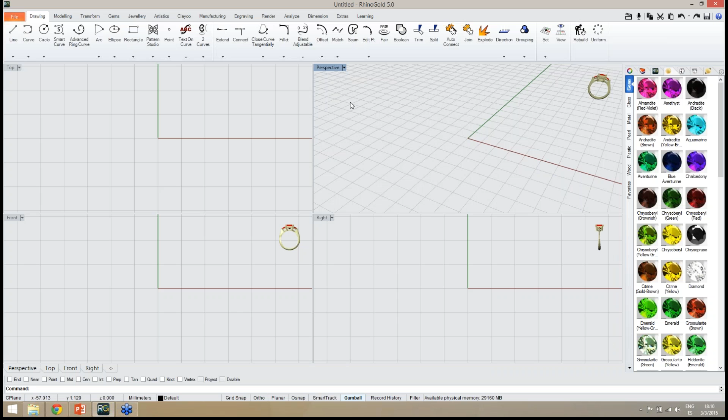Webinar. Let's open RhinoGold, and now let's start with this model. So I'm going to start with an image. Usually we can use any image. In this case, I have one image here, and we can just drag to Rhino.

So the idea is to define a picture frame, and now I can define 2 points. Actually, in the top view, it's easier. So I just define the first point and then the second point. Remember, you can use the ortho to automatically define the image correctly.

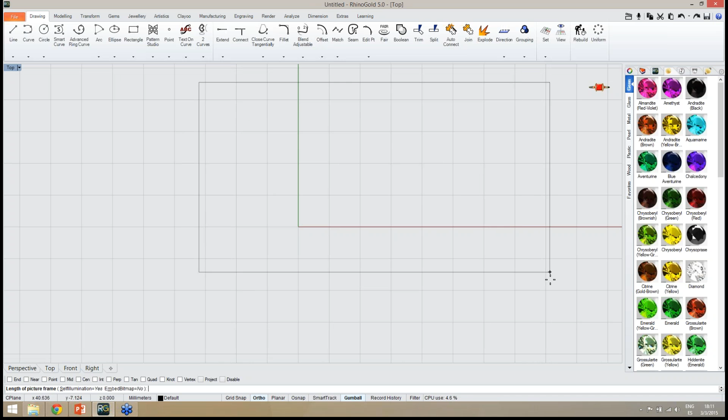So the idea is to define the image. In this case, as you can see, it's not a high quality image, could be any image or a sketch or a photo. So the idea is to guide us during the modeling process.

So I'm going to use this image, and in the properties tab, I will select the material and I can define the transparency. In this case, I will define a little bit more transparency, as you can see, just because I want to see the grid when I am creating the curves. So this is the idea, just define more transparency.

And as you can see, the image is not perfectly centered. So I'm going to use the drag, just click and define the image in the center. And now I'm going to lock the image. So to do it, just go with the lock and unlock.

Remember, we need to use the shift. So I'm going to lock this object, and now when I select it, it's locked. So it's helpful in order to create all the curves without being always selecting the image.

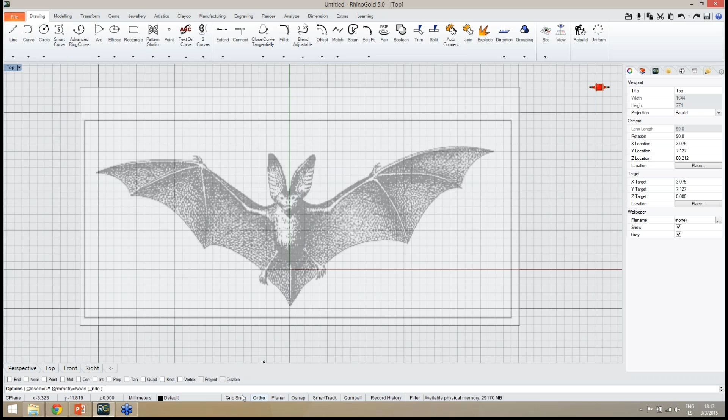And I'm going to activate the Grid Snap option just to start the curve exactly in the midpoint, because in the end I will create the symmetry. So I start with this grid snap activated, then I can disable it. And now the idea is to define my curve just following the image.

So as you can see, easily I can follow the image, just defining the curve. And one thing we have at this point, I want to create a sharp corner. So to do it with the Smart Curve tool, I just need to press the Shift key, and automatically I generate a sharp corner.

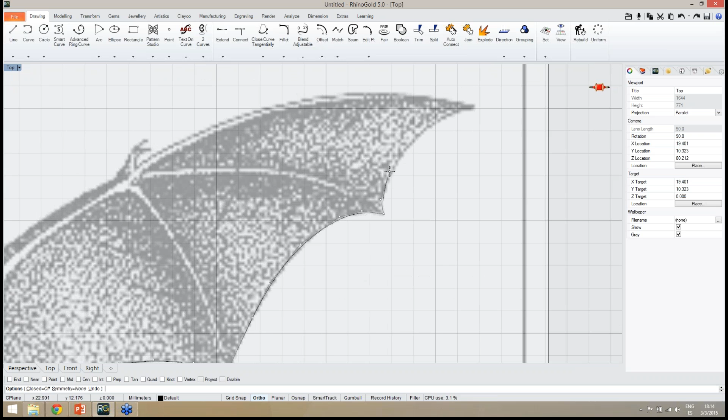So now I can move on with my curve following the image, and here I will do exactly the same. With the Shift key, when I click to define this point, I define a sharp corner and follow the image, just defining some points. Remember, at any moment we can edit or even undo the curve. And once again, Shift to define a sharp corner and following the image again.

So this is the idea, very easy, as you can see. Just find some points, and now I'm going to follow this shape all around easily. When we need to define the curve, in this case with the bend, the curvature, we need to define more points, but then it's just finding the points we need to follow the image.

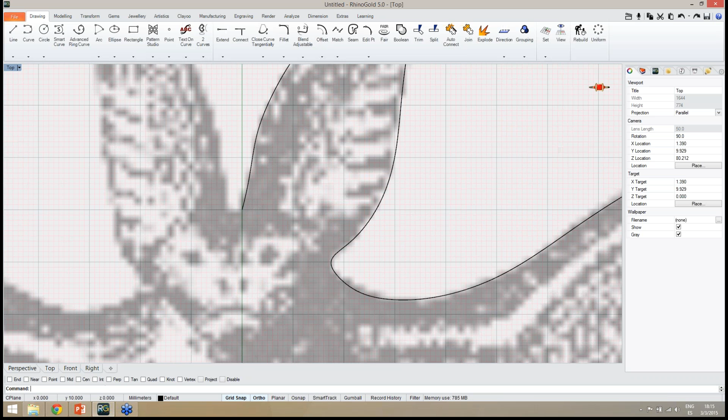In the end, I'm going to activate grid snap again, just to define the midpoint exactly what I want, and press enter to end the curve. So as you can see now, I have this outside curve, and I'm going to save my file.

So on the desktop I can call it bat bracelet. Okay, in this case, save, and now I'm going to move on with my model.

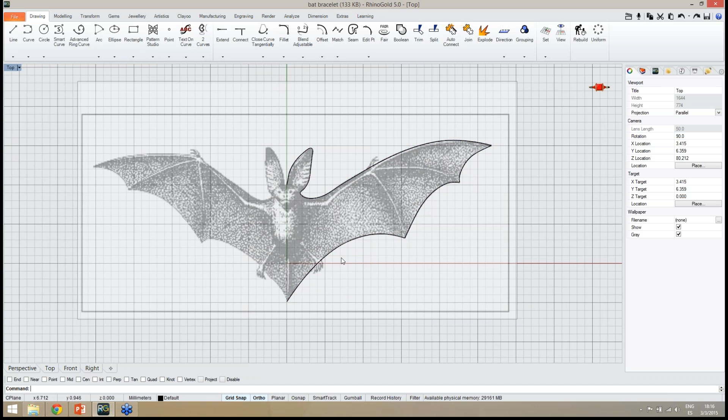So the next step, I'm going to define the rest of the curves. I will need to start with RhinoEmboss. So the next step, I'm going to define the body. So to do it, once again, Smart Curve tool.

And now in the command line, I'm going to use the symmetry option. So I just click on symmetry, and I have vertical, horizontal, and quadruple. So I'm going to use the vertical option, and also turn on the closed option. Everything in the command line, and disable the grid snap. So the idea now is to define the body.

So as you can see, automatically I have the symmetry for my curve, and I'm going to define the curve like this. Okay, looks good.

Also, I will define another curve, once again with the Smart Curve tool, and once again with the vertical symmetry activated and close activated. So now I define another curve here, and let's move on. We'll define now another curve here, just using the Smart Curve tool.

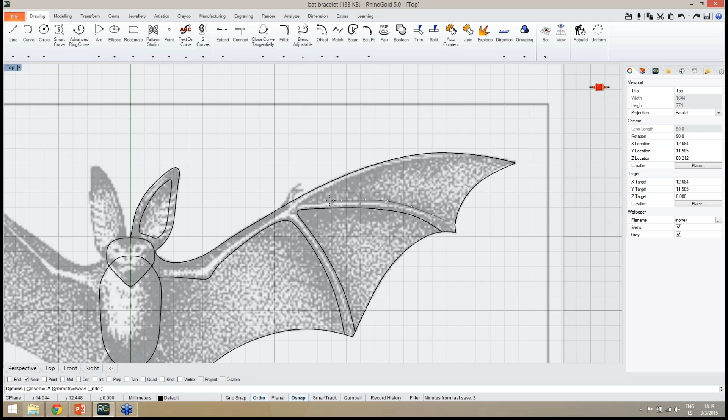The last one in this part, I'm going to use Smart Curve again. I start in here and follow the image as reference. In this area I zoom in and create a few more points to make it exactly as I need, and define the rest of the curve. As you can see, for the last point I use the near option, and we are creating all the curves following the image.

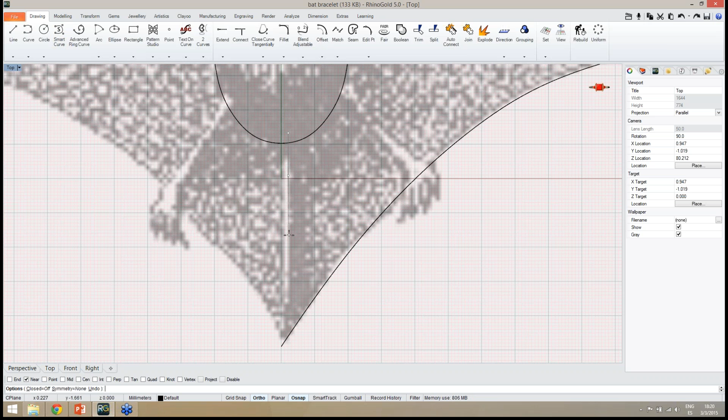So now I need one more curve in here. Once again, Smart Curve. I start maybe a little bit inside, and I can go through this area and finish with the near option again.

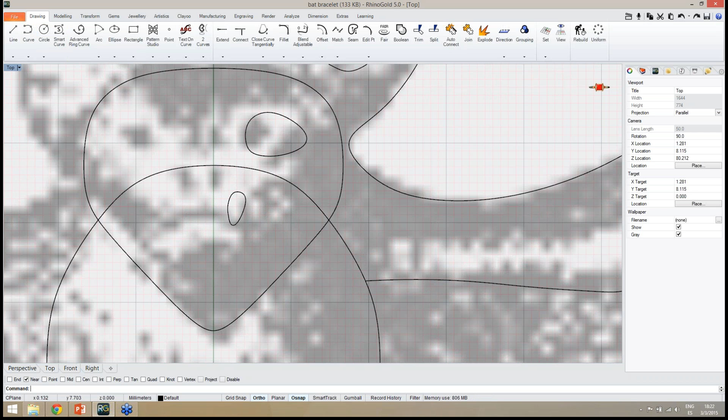And another one for the nose. Okay, Smart Curve. In this case, as you can see, the image is not exactly in the center, but I can adjust the model how I want, and then create the symmetry, so it's very easy.

Now I close the curve once again, and I'm going to create another one in here. So Smart Curve, I'm going to define, close it, and I start inside and follow the image. The resolution is not very good, but it's good enough to use as reference. So I just define the points like this.

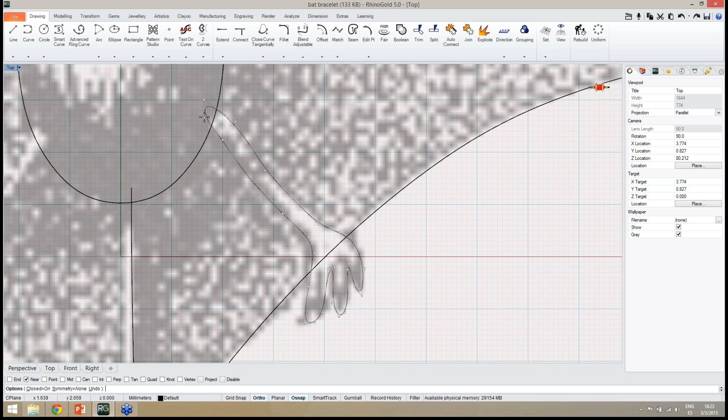The last one. Okay, enter in the end, and looks good. Let's just now I'm going to create the symmetry.

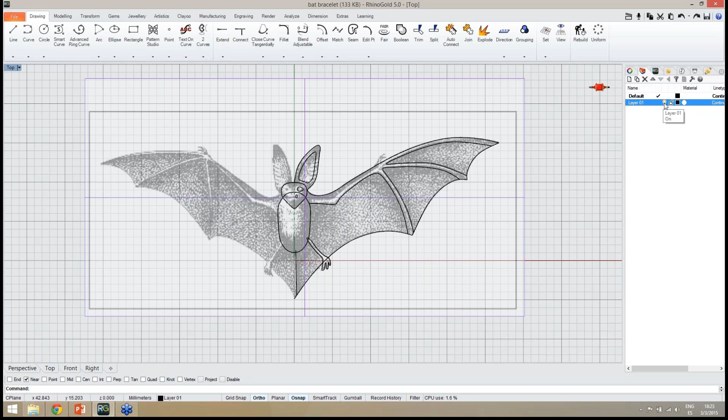First, I think I won't need the image anymore, so I can go to this toolbar, the viewport toolbar, press shift, and now I can unlock objects, and select my image. Under the layers panel I can create a new layer, right click on this new layer and change object layer. So I can change the image layer, and also hide this layer. So this is the curves I have created, and now the idea is to create the symmetry.

So I want to define symmetry for this curve. Now with multiple selection I will use shift, so this curve, this curve, this curve, this, and finally this. So the idea now is to create the symmetry. To do it, under the Transform tab, I'm going to the Mirror submenu and Horizontal Symmetry.

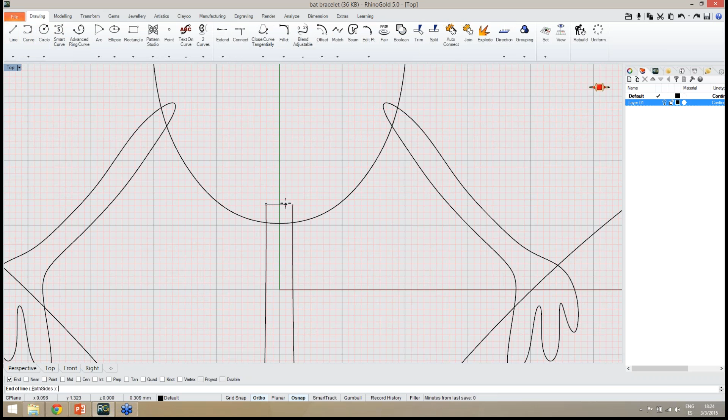Okay, so now I still need a few more curves. Let me adjust probably in here, back to Drawing tab and Smart Curve, or in this case just a line would be enough to close this curve. So just activate the endpoints and disable the near option. So from this endpoint to the other endpoint, I can close this part.

As I told before, at any moment we can select the curve and edit the points, so I can easily adjust, for instance, these points. I activate the gumball and adjust a little bit. So this is the idea. And in this case, I believe it's good enough, so I won't change my curve so much.

And now I will create another curve in here to the nose. I just enable the symmetry vertical and close it. In the command line I have the option, and now I create another curve in here for the nose.

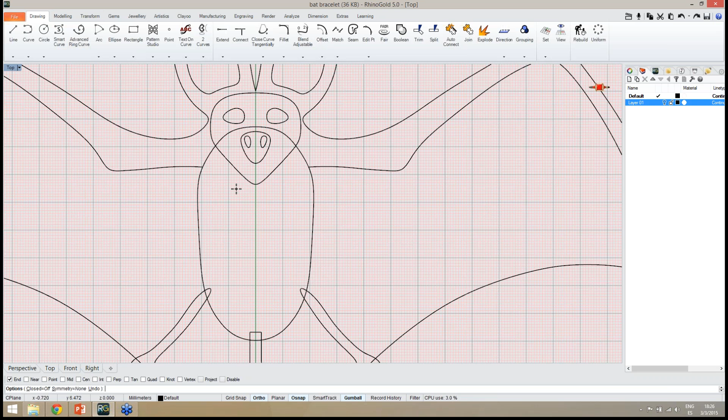And probably some more curves just to define some texture in the model. I will define now open curves, and I'm going to define in one side. So I start in here, something like this.

Enter to use the same tool. So once again, I can define a few curves in here.

Looks enough. I select all these curves and once again, transform tab and symmetry horizontal. As you can see, I have almost all the curves. I need to join and I need to close some parts, so let's see how to do it.

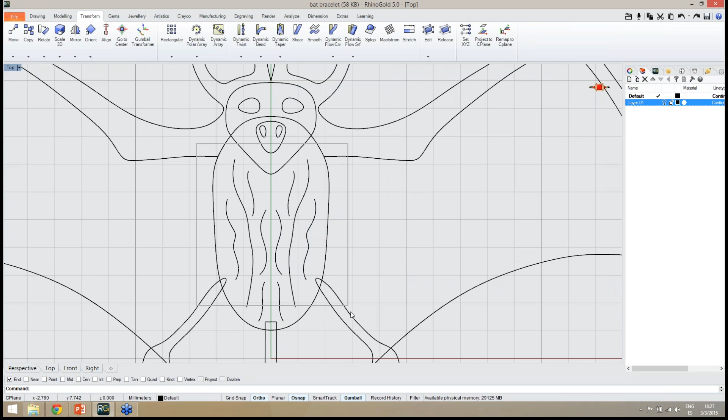Now I have all these curves and I'm going to select all of these curves except this one. Control to deselect, and now I'm going to group these curves. So drawing tab, and I'm going to group all these curves. As you can see now, I just need to select one and all will be selected.

I'm going to hide just a little bit. Remember to press Shift to have this viewport toolbar, and I can hide these curves. Now I need to join this with this one. Remember to select, I use the shift key for multiple selection, and now join tool.

Okay, as you can see now, I have some open curves, and I will need to create some to close these curves. So let's see how to use now the Boolean curves.

So the idea is when I click on this tool, I need to define first to select the curves I want to use. So in this case, this one, this one, this one. First I'm going to escape because I want to join this part with this part. So select both and join. So this is the idea.

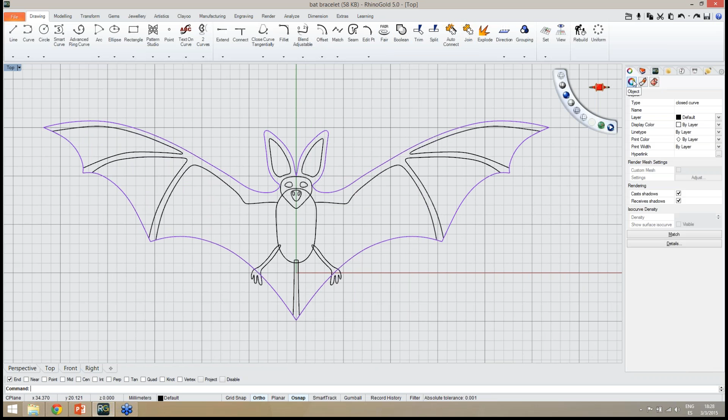As you can see in the properties in the side panel, when we select any object we have the information, object type, closed curve. So it's important in this case to be a closed curve.

Let's now use the Boolean curves. I select the Boolean curve tool, and I need to select the curves I want to use. So first step is to select all these curves from this side, also from the other, and also this one.

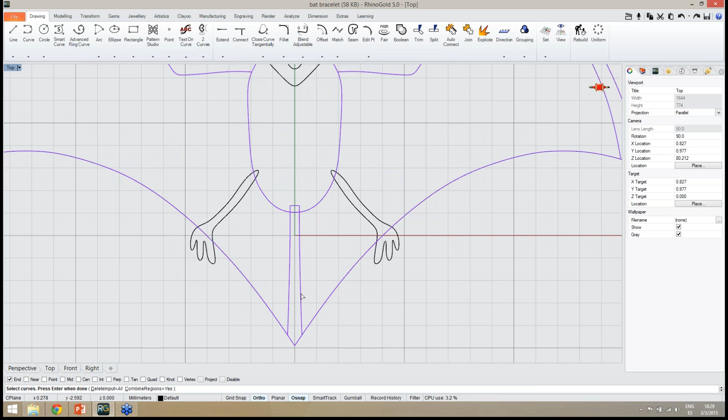And the idea, now I will use also this. So no, I can use this one as well. So I press enter and I have some options.

I can delete all the input curves. In this case I select and I will say none, so I don't want to delete any input curves. And also I can combine regions. So what is combine regions?

I can select, I want this part and this part. So automatically I create, as you can see, a closed curve from all these curves. So I press enter in the end and I have my closed curve.

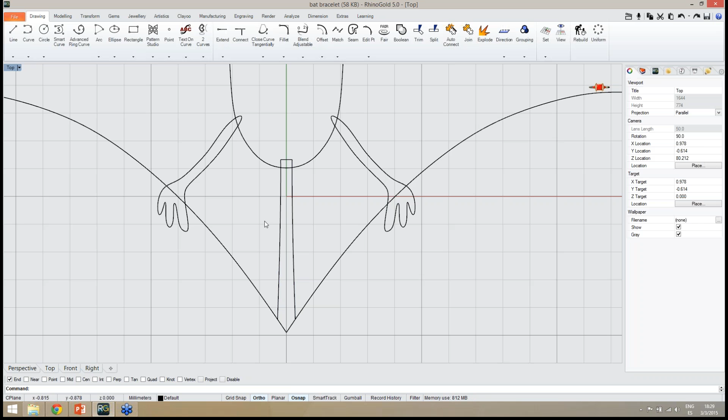And also if I select again, as you can see, I have one curve and the other. So the original one, as I said in the command line, to keep all the curves. Now I need to delete manually, so just delete from the keyboard the open curve, and now I only have one closed curve.

So let's repeat this Boolean curves operation now to the other curves. So once again, I'm going to use the Boolean curve tool. I select the curves I want to use. So in this case, all these curves, also this one, enter.

And now, once again, delete input curves. I will say no, any of the input curves. Also, combine regions. In this case, I will say no.

So the idea is the part I click inside, it will create a closed curve. As you can see now, all this area is a closed curve. Automatically it trims the other curves and closes this one, so I'm sure I have a closed curve. I press enter in the end, and this is the result.

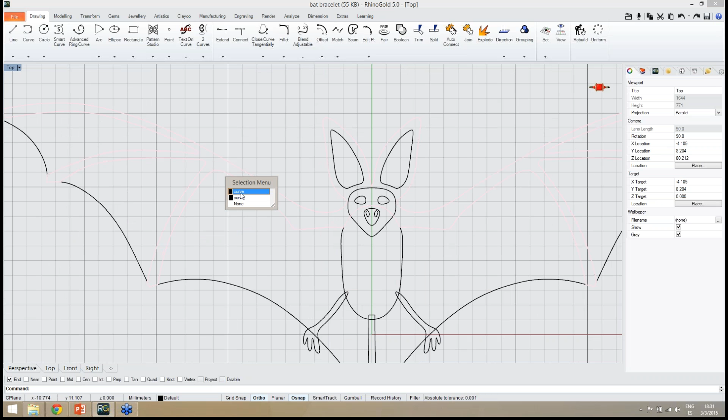As you can see now, I can select in here. I have the options to see which curve I want to select. I select this one and delete with the keyboard. Once again, the same to the other side. I select the open curve and delete. I'm going to do the same with the others. The curves I don't need, I select and delete.

And the same in here. And the same in this side. So delete: I select the curve to make sure it's the open curve and delete from the keyboard. And now, as you can see, it's closed in this side, in here, so we have a closed curve. And the same in here, so this is the idea, and I'm going to show the open curve.

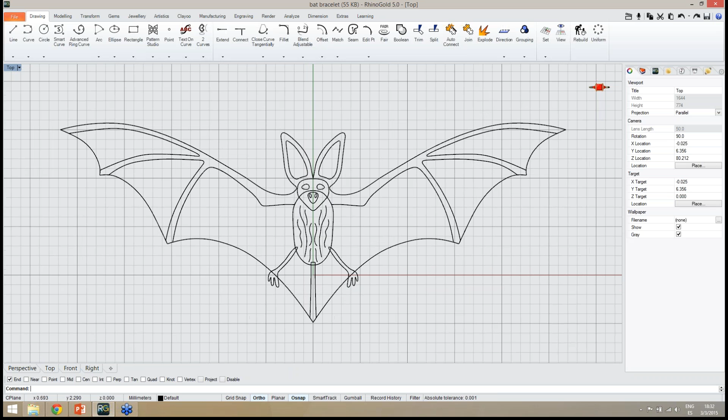So in RhinoEmboss, we will see that we can use open curves and closed curves. Now, I'm going to start with RhinoEmboss. Also, I can show a small trick, because sometimes we are defining very small objects and we need to use very high resolution. Of course, we can use this very high resolution, but it will be a little bit slow in the computer when we are defining lots of operations with a high resolution.

So a good way to change it is just select, in this case, the curves I want to create the reliefs. I activate the gumball and I can easily scale my curves to the size I want. So in this case I won't need a very high resolution and I can create a bigger relief, and in the end I can scale down again to the scale I want to use my model. So this is a good option to avoid very high resolutions. We can easily scale all these curves. And now I'm going to start with the RhinoEmboss.

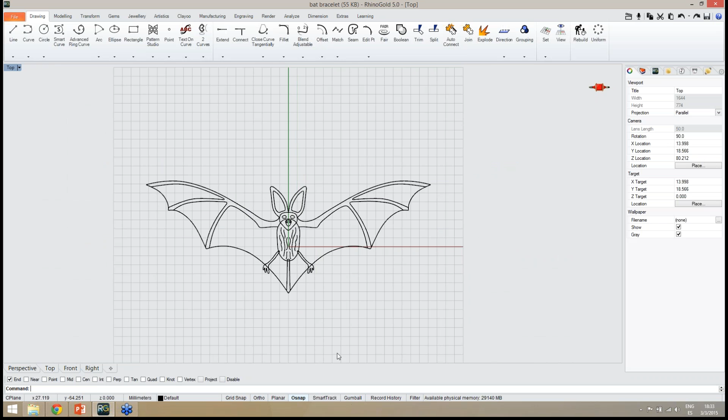So under the Artistics tab, we have the RhinoEmboss icon, and the first step when we click on RhinoEmboss is to define the project settings. We have several types of options. In this case, I want to use core, which means that I'm going to define a flat bottom to my relief. And I want to delete the base, which means that the relief will end with the curves instead of being a square, and I can also define the cap distance. In this case, I'm going to use 1 millimeter.

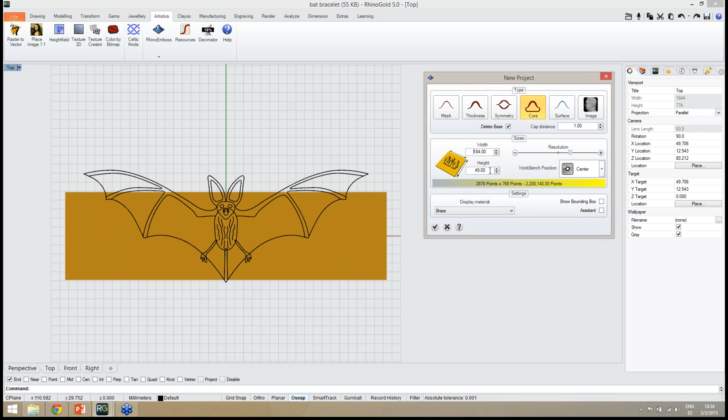As we have seen before, we can use any resolution. Remember, bigger resolution will mean slow performance or probably a big file size. So let's try to make a good resolution, but probably we don't need the maximum. At any moment we can adjust everything, and of course the measures of my project. I just want to make sure it's bigger than the curve, in this side and also in this side. And now the material; in this case, I will keep the material.

And now when I check in here, automatically I will have the RhinoEmboss panel, and I can start defining my relief. So I'm going to the perspective, and in here I'm going to start defining my bat. The first step is to add a new operation. Operation type is operation by profile. By default, I will keep this operation. And I need to select a curve to define this operation.

So I click in here, and I need to select one curve or multiple curves. In this case, just a single curve. I will select the outside curve. I press enter, as you can see in the command line. After selecting the curves, press enter, and automatically I have my profile applied on the curve. As you can see, this is the profile. I can use the gumballs to change the measures. Remember, with double click I can define the exact measure I want to use.

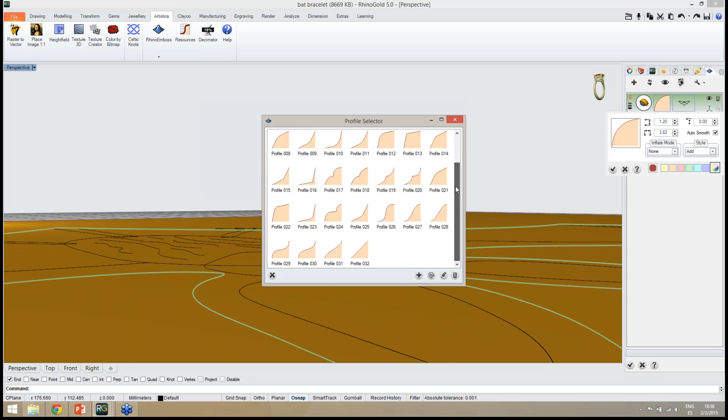Let's try 1.2 millimeters. And the profile is this one, but at any moment I can select the profile, and as you can see we have several profiles, and of course you can add your own profiles. So I select my profile, now I define the measures, and in the end I just need to refresh to calculate the results. So as you can see, I easily generate my relief from the first curve. It looks good.

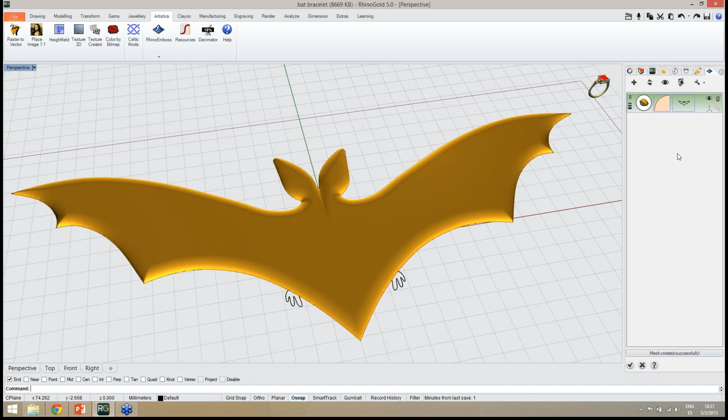I will keep it exactly like this, and with this icon I can show and hide the gumball for this operation. So I can hide this gumball, and now in the next step I'm going to add a new operation. I will keep using the default operation type, operation by profile. We will see that we have several different operations. So operation type by profile, I select my curve. In this case I'm going to use this one.

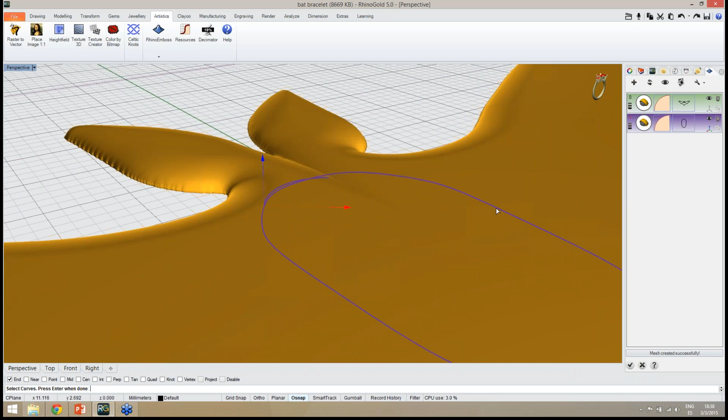And as you can see now I have my curve. In here I can define with the gumball the profile, and in here the same. So the idea now, remember, we are defining the profile exactly on the curve, but in the operation settings I have the style defined as add, which means that it's going to add this profile to the previous one. So I just need to refresh, and it's calculating the results.

Okay, this is the result. I can of course adjust a little bit less and probably a little bit in here and refresh again, but looks good. In the end I will use the smooth to break all these sharp corners. Also we have by default for each operation the auto smooth. We can disable it, as you can see, and refresh again. So this is the idea.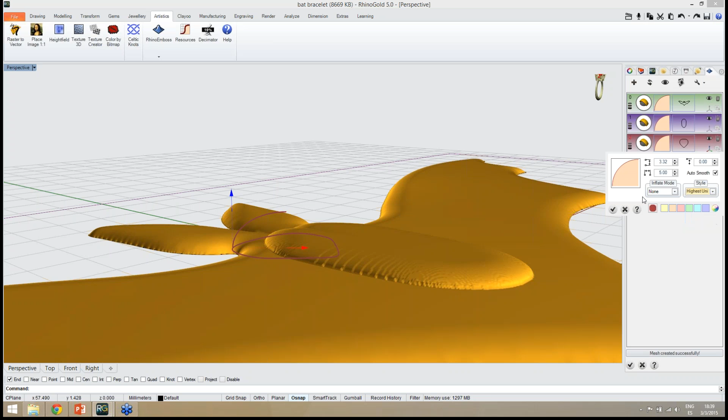I define in this case the second operation. I can hide the gumball, and now I'm going to add a new operation, operation type by profile, and I will add another curve, in this case this one. But now instead of adding this curve to the previous one, I'm going to the operation settings, and I'm going to define the style. Instead of add, I'm going to define highest union. So it's like a Boolean union operation. So the biggest one will be on the top.

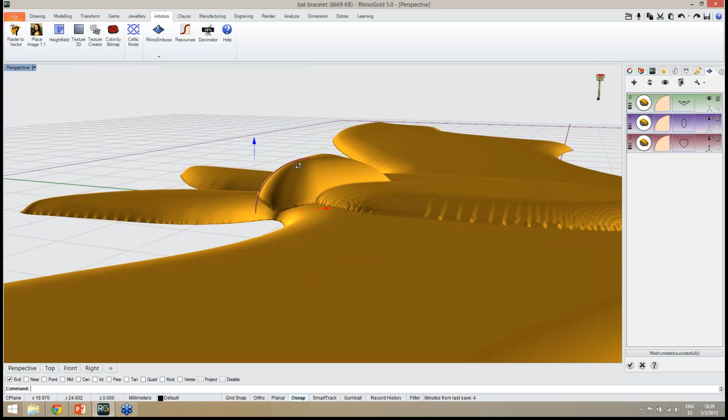I will define this profile a little bit bigger than the previous ones. I adjust the measures as I want, and I refresh. Okay, as you can see now, instead of adding to the previous, it's making the biggest one, it's following exactly the curve, so I can reduce a little bit, and in here as well, refresh again. Let's see the results. Looks good.

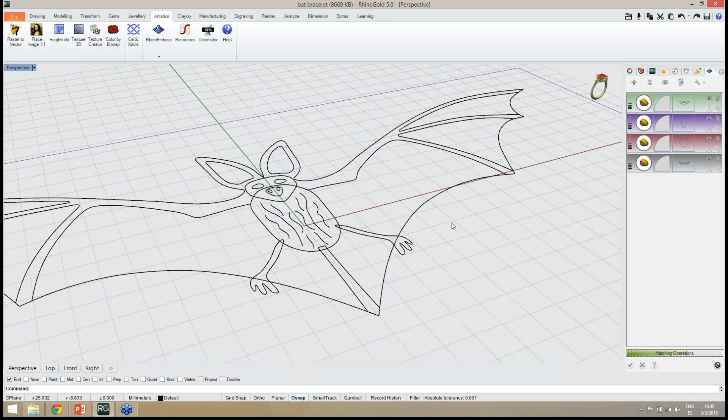I'm going now to move on to the next operation. I'm going to add a new operation, and I'm going to select the curve, in this case this closed curve. Okay, so I just define the gumball. Remember, we can hide the previous gumballs, and in this case I'm going to define it a little bit smaller and refresh. Okay, as you can see now, the option was add to the previous operation by default, so it's adding to the others.

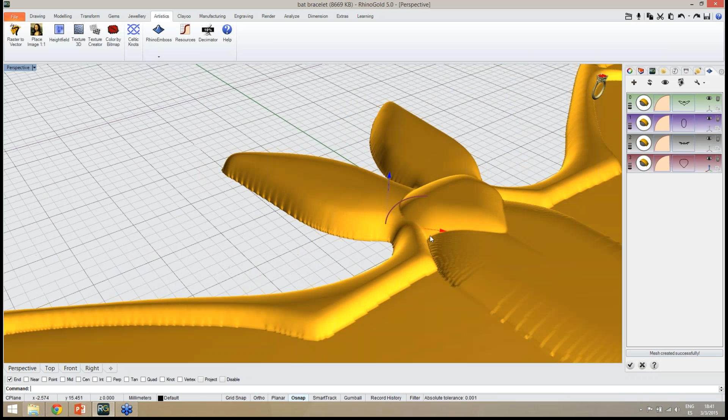What I can do is, instead of using this at the bottom, I can use this operation before the others. So to move operations, I can use this option to change the position. As you can see now, I moved operation number 2 with number 3, and I refresh to check the results, and easily I can change the operations. I will just need to adjust the results a little bit. Now I'm going to hide this gumball and show this gumball again, adjust in here and refresh. As you can see, easily we can change the order of operations, and this can be really useful.

So now I'm going to move on to the next operation, but before that I'm going to add a new operation, and I'm going to use operation type smooth. I just want to smooth my project a little bit, so I can use the smooth. I have a circle, and I just need to click and smooth. Easily I can smooth my sharp edges. So this is the idea. Easily I can smooth some parts of the project. Also in here I can smooth a little bit.

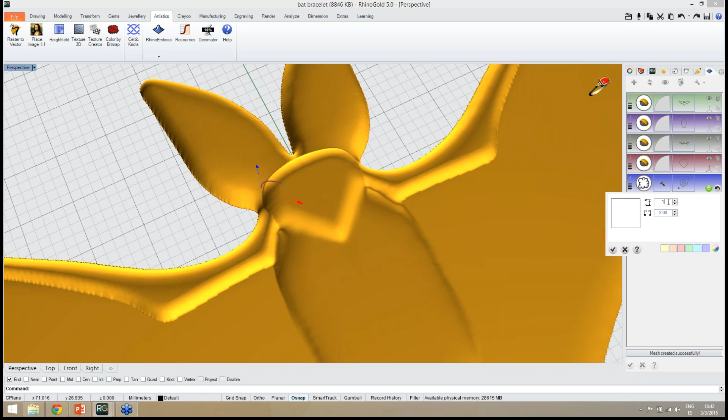Just click. Of course, we can define in the operation settings different smooth levels as well as the diameter of my circle, so I have complete control. And the same in here. I will smooth in this area as well. As you can see, easily I can smooth this part. And now I can smooth a little bit more. And now I just turn off the smooth operation, and I can hide the previous gumball. And I'm going to move on.

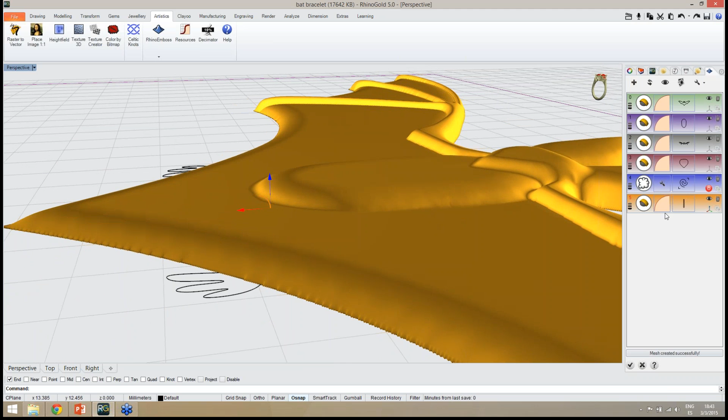So the next operation, I need to add another curve, in this case at the bottom. So I'm going to select this one, and let's see the results. Adjust the gumball. In this case, I will once again use highest union instead of add, and let's refresh to see the results.

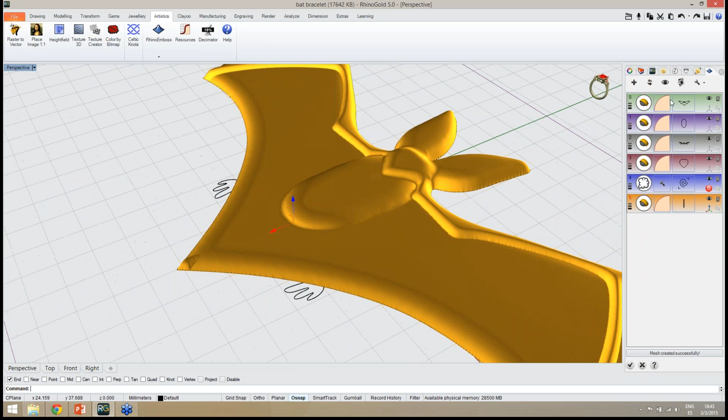As you can see, highest union is not enough to show the curve, which means that the profile needs to be a little bit bigger, something like this. So refresh again, and let's see the results. Okay, as you can see now, it's good enough. Maybe I can add a little bit more and refresh again, but this is the idea. And of course in the end I will smooth.

So let me hide the gumball, and as you can see, the bat is getting shape. Now another operation, select the curves. I'm going to select this and this, and now I don't want to add, I want to subtract. So under the operation settings, in the style, instead of add, I'm going to use subtract. So this is the idea, just define subtract.

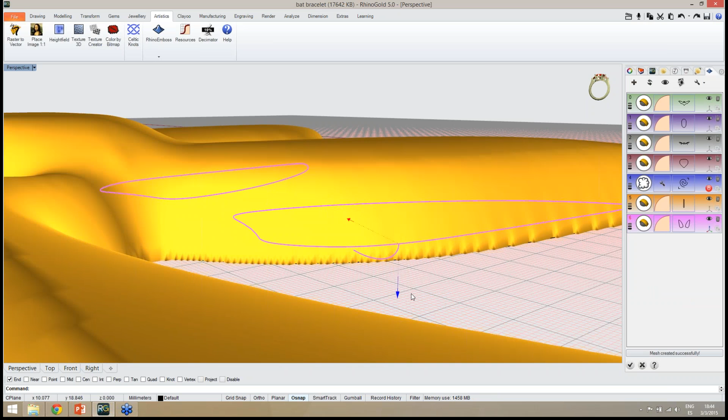Now we can adjust the profile. As you can see, it's in the bottom. You can adjust the height, everything from the profile. So it will subtract to the other profile. I just refresh, and easily I have the profile subtracted. In this case, I'm going to change a little bit the distance and refresh again. Just remember, we adjust the gumballs and refresh to update the results. Okay, in the end I will smooth all these curves, so I will leave it exactly how it is.

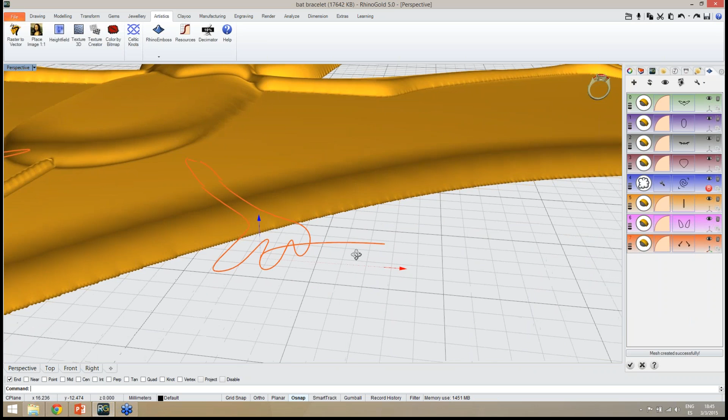Hide the gumball, and now I'm going to add a new operation. The curve, I'm going to use this and this one, enter, and now I'm going to use once again operation type. I'm going to use the highest union, and I just need to adjust the profile, in this case to be bigger than the previous one, and refresh. Let's see if it's enough. It seems enough. I can even add a little bit more, but looks good enough. Refresh. So this is the idea. Operation by operation, we are defining our reliefs.

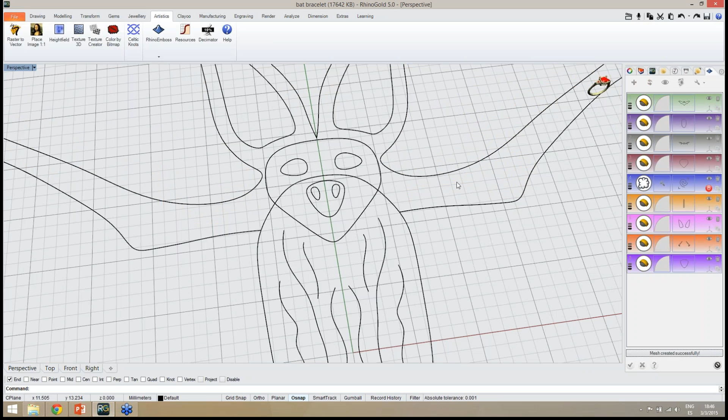And now I'm going to the latest curves. I'm going to add a new operation, operation type. In this case, operation curve, I will choose this one, and it's add by default. I just need to adjust the gumball and refresh. Okay, then I will smooth this curve. Actually, I can smooth now.

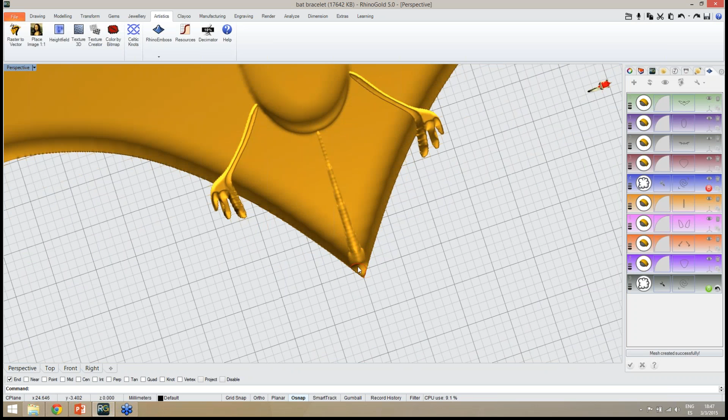So just add a new operation, operation type, smooth, and I just need to smooth my shape. As you can see easily, I can adjust exactly how I need. The same in here. I smooth this area, and the same to the other side. This is the idea, very, very easy. And probably a little bit in here as well. Can smooth a little bit. Looks good enough.

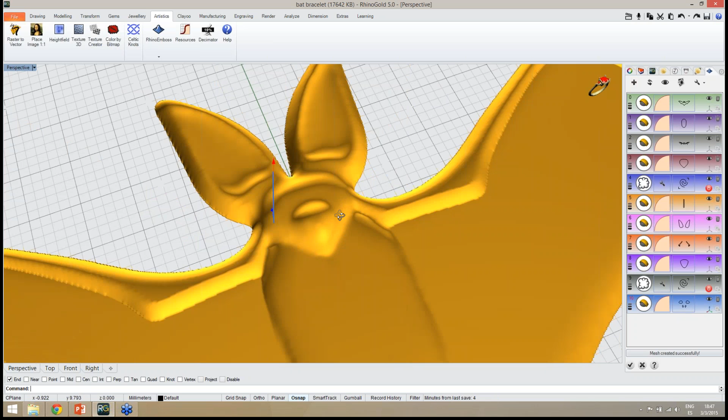And now I will add a new operation. Select the curves, in this case the eyes and the nose. So in this case, once again, instead of operation type, by default add, I will subtract, and I just need to adjust the gumball exactly as I need, and refresh. Let's see the results. Looks good.

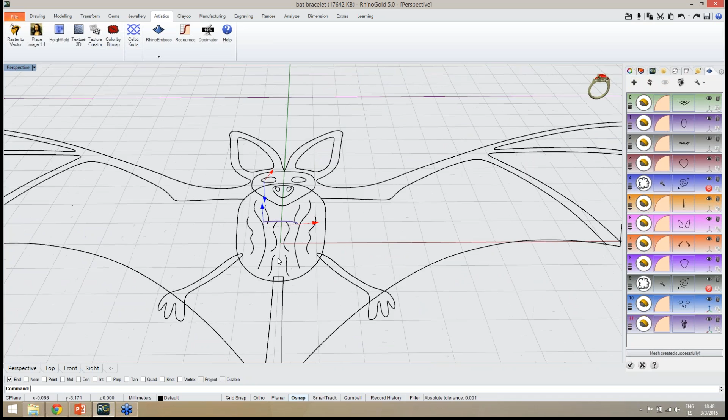And finally, one other operation to all this group. In this case, we will see that this is open curves. Let's see the results. As you can see, I can hide and show the results. So I can just hide the relief just to define my gumball. And now the idea when using open curves, the reference is the curve, so I need to adjust distance for the original curve and the height. Of course, I will subtract, so it will be exactly the same, but to the bottom. So I just need to adjust the gumball, the height, and finally show the results and refresh.

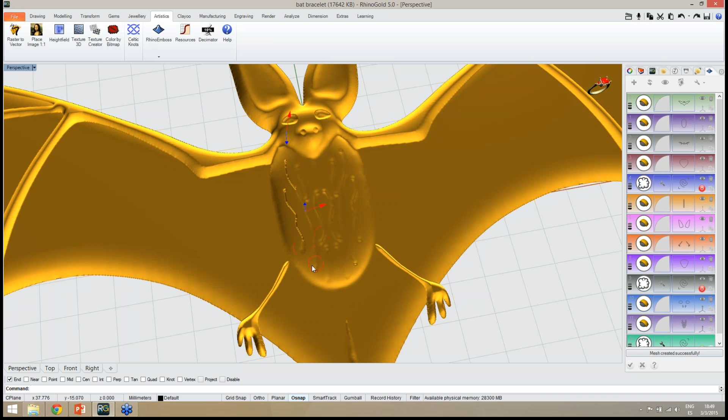Okay, this is the idea, just to add a small texture in here. I can, of course, add a new operation to smooth, so select operation type smooth, and I can easily smooth a little bit my previous operation, just to show you that easily with a few curves we can actually define our model. So this is the idea. I would say that now I have all the model defined with RhinoEmboss.

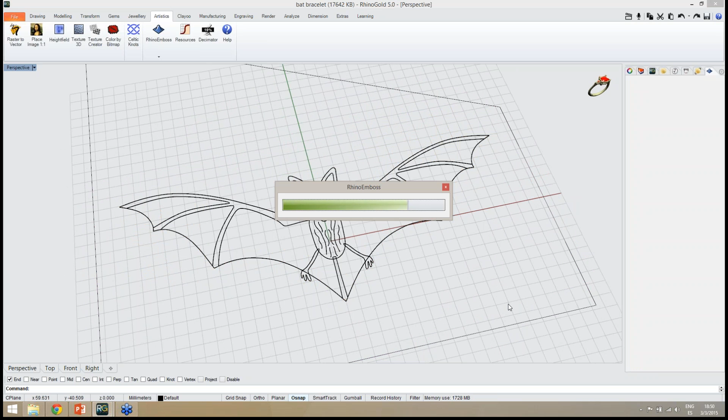And of course, as we have seen, it's very easy to add more curves, more operations. I would say that with RhinoEmboss we can create lots of different models. And after this, when I define everything with RhinoEmboss, I just need to check in here, and RhinoEmboss will generate my relief, so it will generate the results. So at this moment, RhinoEmboss is generating the results. And what happens now is that automatically it will open the decimator.

So let's see what is the decimator. The decimator allows us to reduce the file size, the resolution of the mesh. And the idea is to reduce using a percentage, any percentage. For instance, let's see 50%. I will zoom in just a little bit to see the difference between the original mesh and the result.

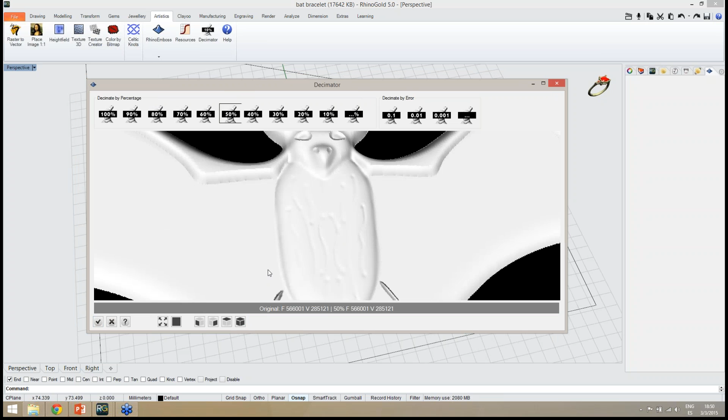So when I select 50%, it will calculate the mesh, and as you can see, we don't see a big difference, which means that we can decimate without losing detail. For instance, if I use 10%, it will probably be too much. In this case, we can see that we still have the details, but probably it's too much.

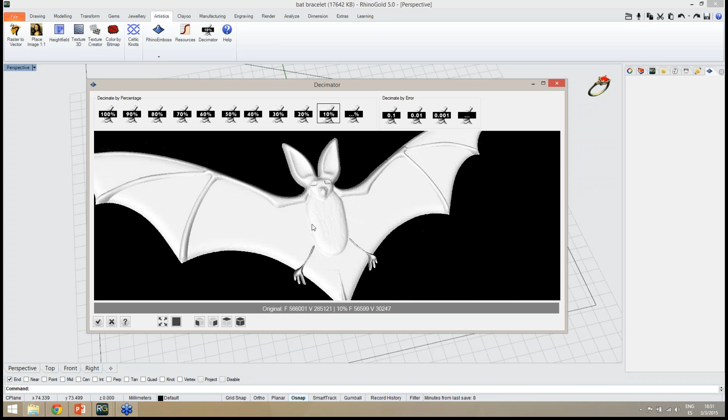This operation, the decimator, allows us to reduce the file size, but of course we need to be aware that the real scale of our object is important, because sometimes we are defining very small objects, and the detail we lose is not enough to be seen after printing. So always remember to take into consideration the real scale of the model.

In this case, I can use any other percentage, or I can of course use the original one. I'm going to use 70%. I think it's enough. Here we can see the number of faces and vertices from the original and from the decimated. So as you can see, we can reduce the file size. It can be really useful. And now I just check here to add the relief, in this case the result, to the document. Okay, so as you can see, it was successfully added to the document.

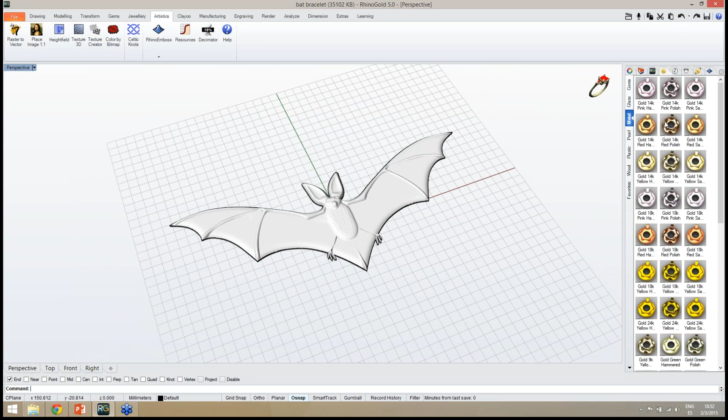Let me change the display mode. I can of course apply any material. Let's apply, for instance, yellow gold. As you know, RhinoEmboss generates flat objects, but I can use any transform tool to adapt my object exactly how I need. So I can easily bend my objects, applying other objects. So I can use all these tools to define what I want.

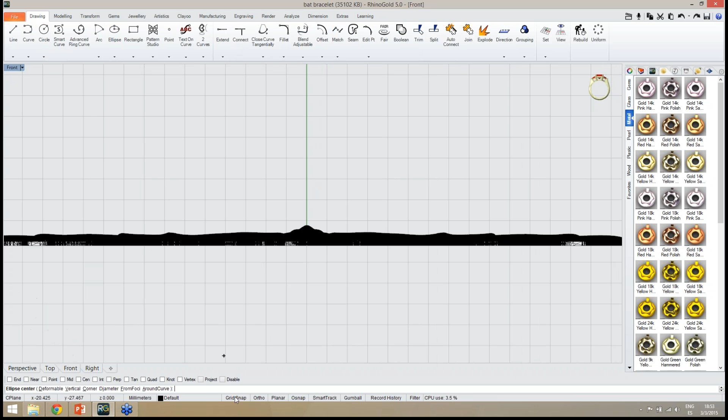So in this case, I want to define a bangle. I'm going to the front view to define the curve of my bangle. I'm going to use, under the drawing tab, the ellipse tool. I'm going to remove the endpoint snap, and I'm going to activate grid snap. So the first point, I'm going to define at 0, and then I just need to define my measure.

So I will define the size 33 millimeters, enter, and now remember, I'm just defining one side, so the other will make it 66. So one side, I click, and the other the same. In this case, I'm going to use 22 to have 44 total. So I have the curve of my bangle, and now I can scale my object again.

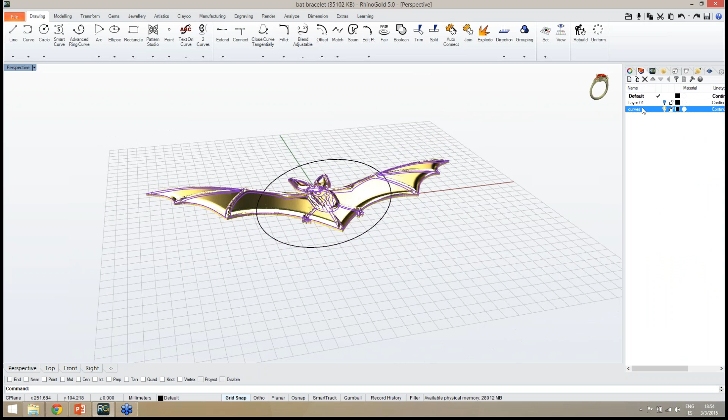Let me select all the curves, middle mouse button, select all the curves, and deselect the ellipse with Control. And I can create another layer, call it curves, okay, and change object layer, so I can hide the layer and hide all the curves. So now I can easily scale my object. Let's use the gumball and scale my object to have the size I want.

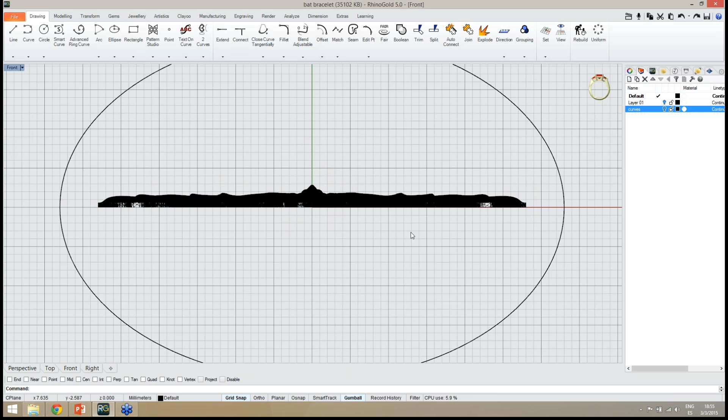Remember, press Shift if you are using the gumball to scale in 3 directions. So I scale my object exactly how I want, and remember we scale in 3 directions. In the front view, it's probably recommendable to scale now in just 1 direction. So if we don't press Shift, we can easily scale in 1 direction, just to make sure I will have the measures I want. Remember, you can use the grid as reference. I want to have at least 2 millimeters of relief, so I can select my object and scale a little bit more. Something like this seems good enough.

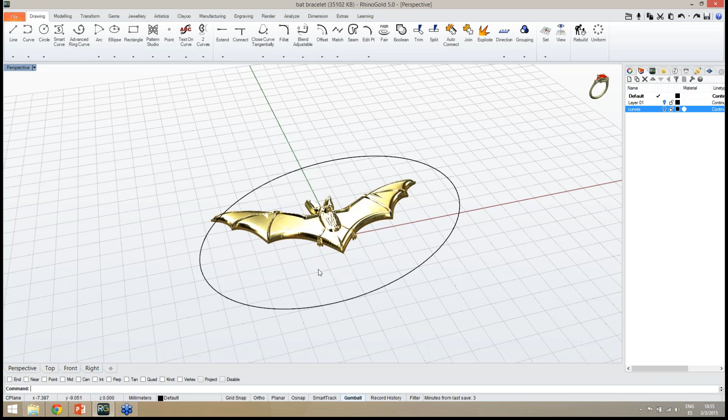Back to the perspective, and now, in the front view, I'm going to place my object on top of the curve, and I'm going to use in this case the bend tool. The bend tool, under the transform tab, allows me to define a curvature for my object. So I just select my objects to bend, enter, and now as you can see I have these gumballs, and I can use them to bend my object.

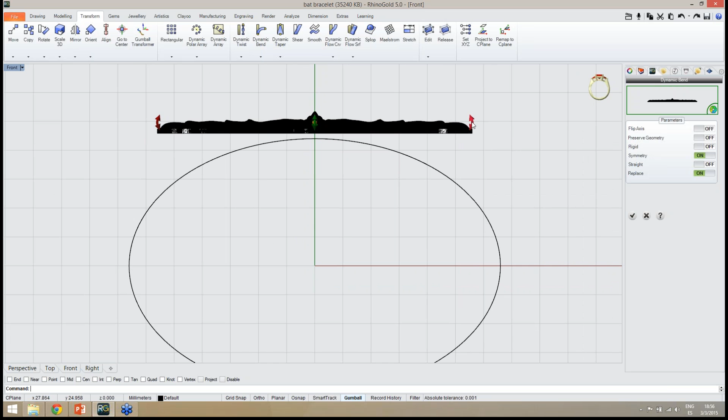So drag the gumball down, and as you can see symmetry is activated in the parameters, so I'm doing both sides, a little bit less, okay, and as you can see I can easily bend my relief, and this is the idea. Now I have the result exactly as I want. I click OK, and now I can select, adjust the position, and I'm going to use the dynamic profile to define the rest of the bangle.

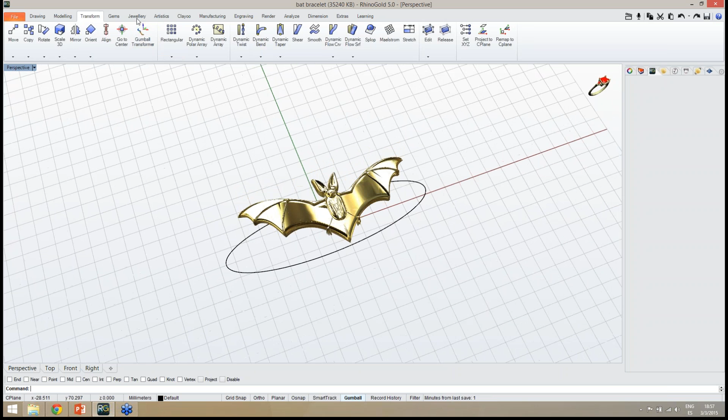So jewelry tab, dynamic profile tool, I select the curve where I want to apply the profile, so I select this one, and I define the measure. So in this case I want to use a width of 5 millimeters, and height I can use 1.2. Enter again. As you can see, the orientation is not exactly as I want, so I can easily rotate.

Let's try 90 degrees, enter. It's not the correct orientation, so let's try again now with 270 degrees. Enter, and now this is the orientation I want. I can save, so I can add my profile to the document.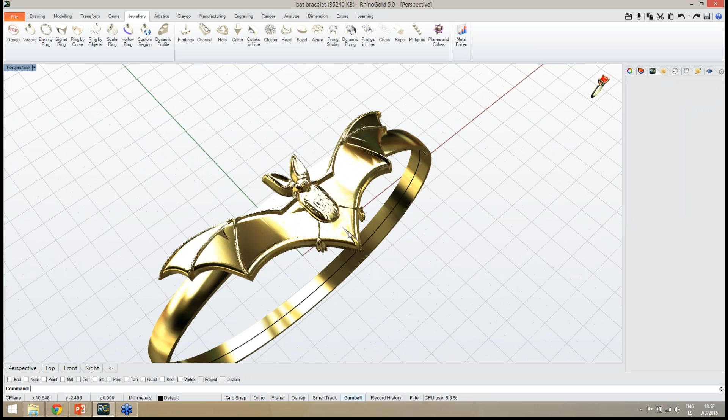In this case, I can even adjust my bangle a little bit more in the bracelet. So this is the idea. Easily I define the relief, I define my model, and I can select this curve and change it once again in the curves layer. So right click, change object layer, and as you can see, easily I have my bangle ready.

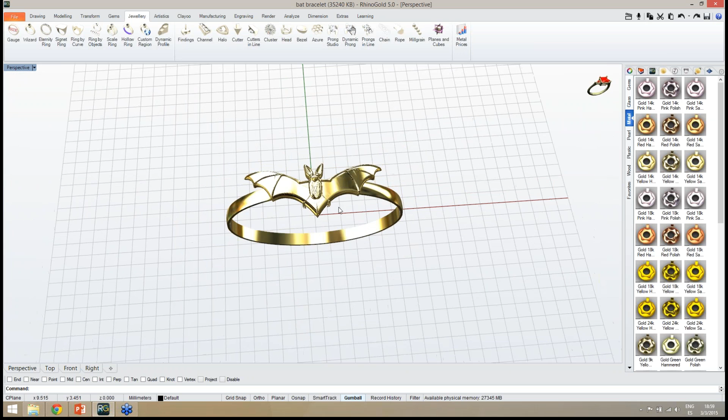As you can see, RhinoEmboss is really easy to use. Now I would say that this would be the idea to create this project. Probably we still have a few more minutes, so I'll just create a render from this model.

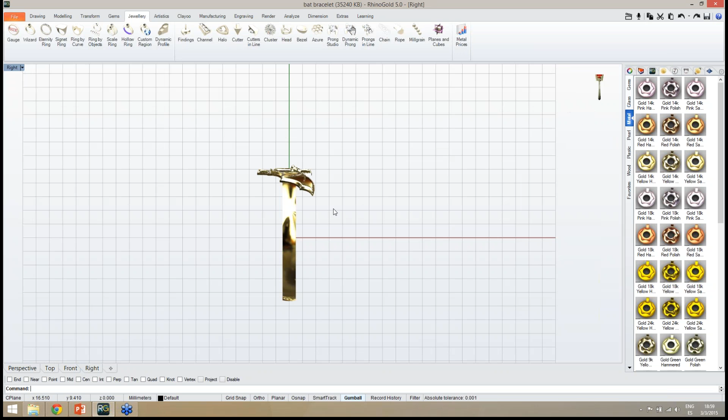So to do a render in the right view, let me change display mode. I'm going to select my objects and rotate a little bit to define the render position. Let's imagine the floor will be in here, so I rotate my model back to the perspective, and I can define the position.

To start the render, I go to the Render tab and open Render Studio. As you can see, the background is automatically changed because Render Studio loads the environment to make the render.

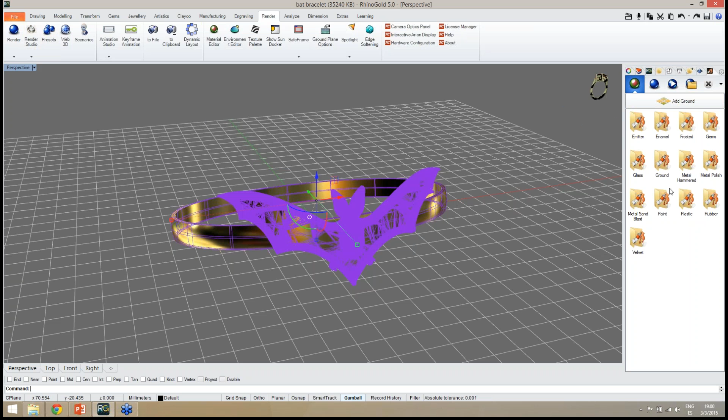Now I can easily define the material. So I select my objects and let's use metal sandblast. Double click, and we apply the material. And now I can easily define other parameters.

I can add ground, and of course, once again, let's define the ground material. Let me use, now I select the ground, and let's try this one. Looks good, let's see the results.

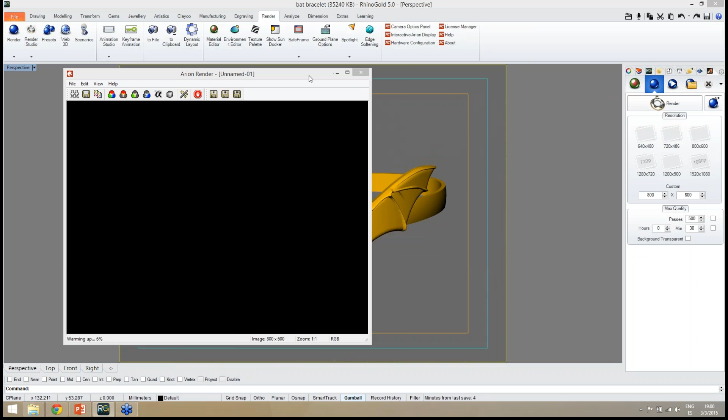So I just need to define under the Render tab the resolution I want to use, define the position, and click on Render to start the render. As you can see, I didn't define any number of passes or any time limit, so it will just start rendering.

I will stop the render when I say it's good enough for me. As you can see, it's calculating the render. This is the result.

Let's see. It will take just a little bit more to clean all this noise from the image. It will be improving the render, so let's wait just a little bit more.

As you can see, now I already have 700 passes with only 40 seconds. So let's see the render results.

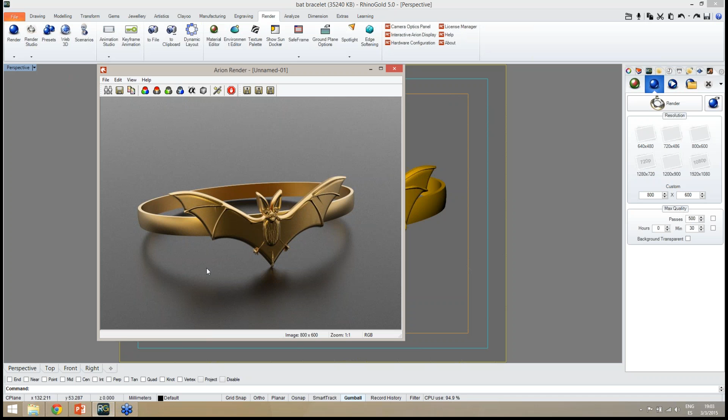Okay, I believe the render is good enough. Let me stop the render, and as you know, we have the Render Studio image editor. We can add more contrast, more brightness, and we can add our own logo.

For instance, I select one image from here, and I can move my image, I can also scale the size of the image. So easily I can define my render and, of course, save my file, in this case as render, and this is the idea.

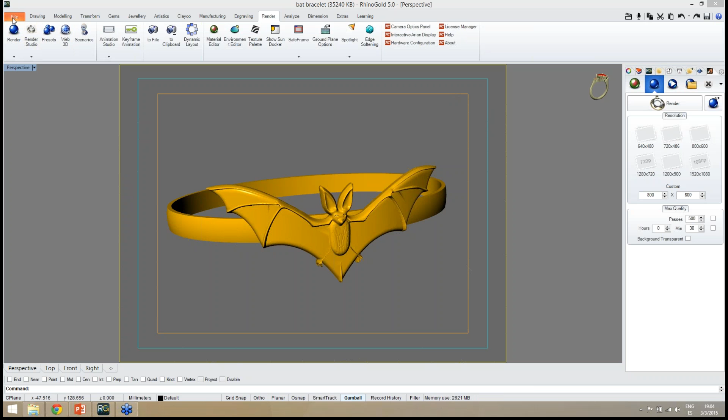Okay guys, what do you think about RhinoEmboss? It's quite good, no? Pedro, they were asking here, not only in RhinoEmboss projects, but in other projects, about wanting to place one object, let's say like this bat, onto another. And I guess the Splop tool is actually the ideal one. May you show, in a new project, just to see the Splop tool? Of course, it's a good idea.

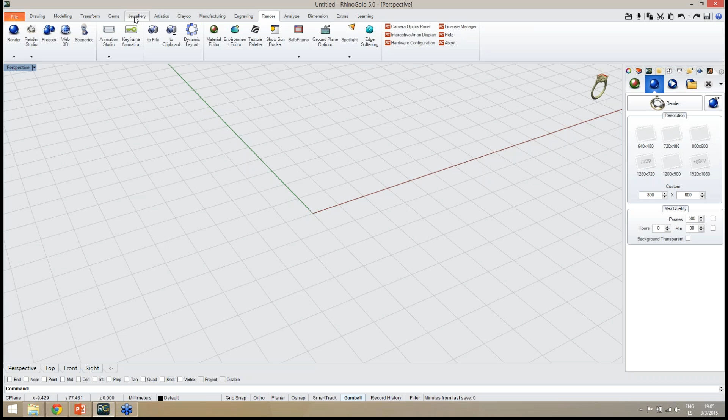Actually, I could use Splop in this project. Splop allows us, and of course I can use it in a RhinoEmboss project or any other project. For instance, let me create a ring just to show you how it works. So easily I define a ring with the Ring Wizard just to define one object, and now let's try to Splop one object, any object, into this ring.

Let me use standard text, so it will be good to show. Hello, it's also a good option, and I will define solids. So just define the measure to show you. In this case I will use, I believe 5 millimeters would be enough.

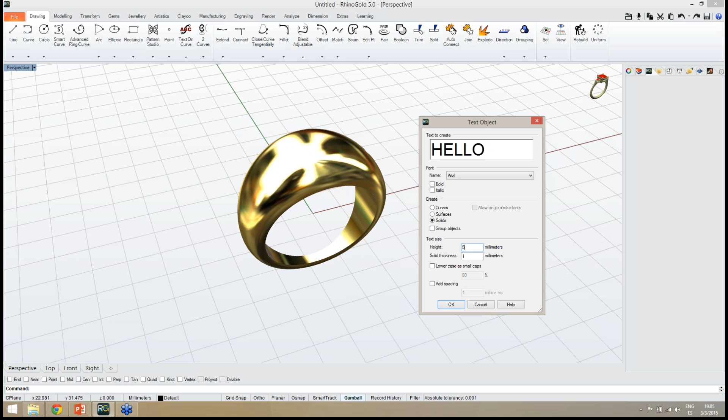Okay, and I define my letters in here. So the idea is to define any object, or several objects, could be a RhinoEmboss project or any other object, and place this along another surface. So the idea with the Splop tool, it's actually a very powerful tool.

We just need to use Splop under the Transform tab, and the first step is to define the object to Splop. So in this case, I select all these letters, I press Enter, and I need to define the center of a reference sphere. This sphere will be used as reference to project my objects onto another object.

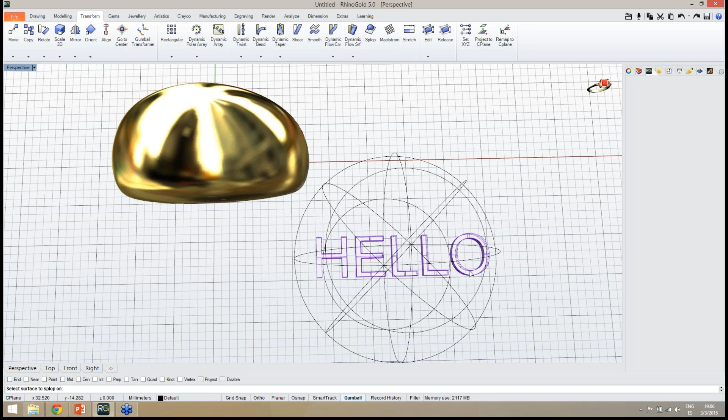So more or less in the middle, I define the center of my sphere, and now I define the end of my sphere. So this sphere will be my reference. When I click, the next step is to select the surface to splop on.

So I select. Pedro, do you click enter or right click here? Actually, I'm using always enter, but right click is exactly the same inside RhinoGold. So remember, when we click enter, it's the same as right clicking with the mouse.

After defining the surface, I continue. Now, as you can see in the command line, it will give me the instruction. So I need to define the center of the sphere in this surface, of course. Let's imagine I'm defining this sphere, but now in this one.

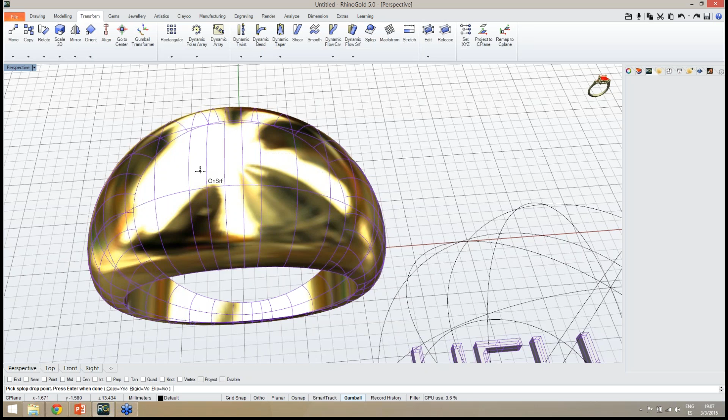So I click on the center of the sphere, and now I just define the direction, and with the direction I also define the scale and rotation. So the size and rotation I can define easily with the second point. Now I define the second point, and as you can see, I press enter at the end, and I apply one object, or in this case several objects, onto another object.

This is the idea behind the Splop tool. It's also a very powerful tool to use after creating a RhinoEmboss project, to apply the relief onto any other shape.

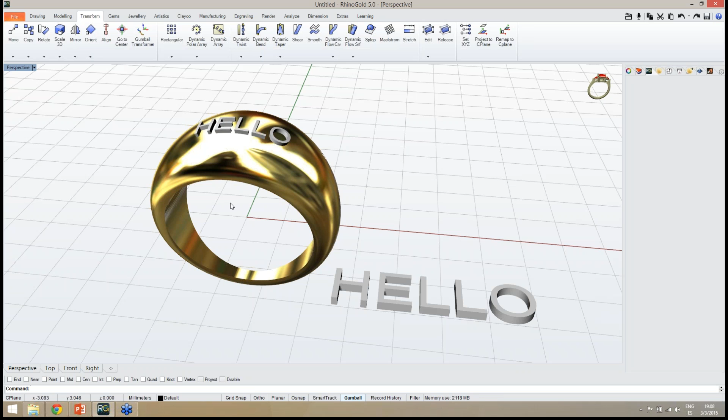Very good, thank you, Pedro. You're welcome. Today we are just 8 minutes out of time, so Pedro, can you just go back to the PowerPoint presentation? Of course, here you go.